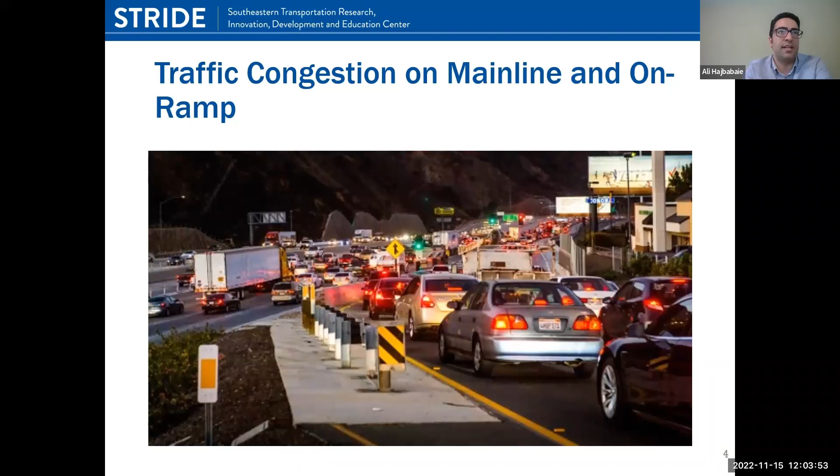What you see on this slide is a freeway that is pretty much congested, with an on-ramp heading to this freeway, and on-ramp metering signals on this on-ramp. The freeway is congested, the on-ramp is also congested, and what can happen in situations like this is that we meter traffic on the on-ramp to help the flow on the freeway. But the queue can spill back from the on-ramp to the interchange and then to upstream intersections, and the traffic congestion on the arterial street could be really bad.

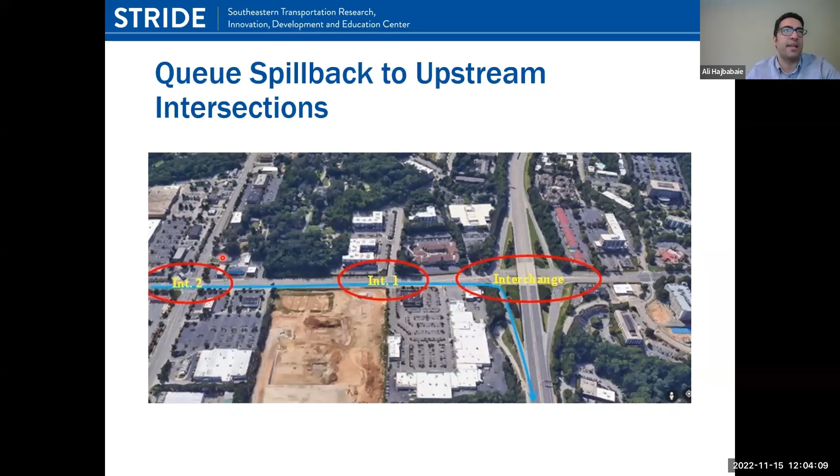So what are some solutions that can help mitigate this situation? First, we need to be able to predict the start of queue spillback from the on-ramp to the upstream intersections. When we can do that, we can either flush the traffic on the on-ramp — something that has been used, though the issue is that the traffic situation on the freeway main line could get worse, because then we don't control any of the traffic going from the on-ramp to the freeway. We can use upstream intersection signals to manage traffic more efficiently, distributing the queue that was spilling back to upstream intersections on the arterial street, or we can go a step further and use upstream intersection signals in coordination with ramp metering signals, essentially doing integrated corridor management operations.

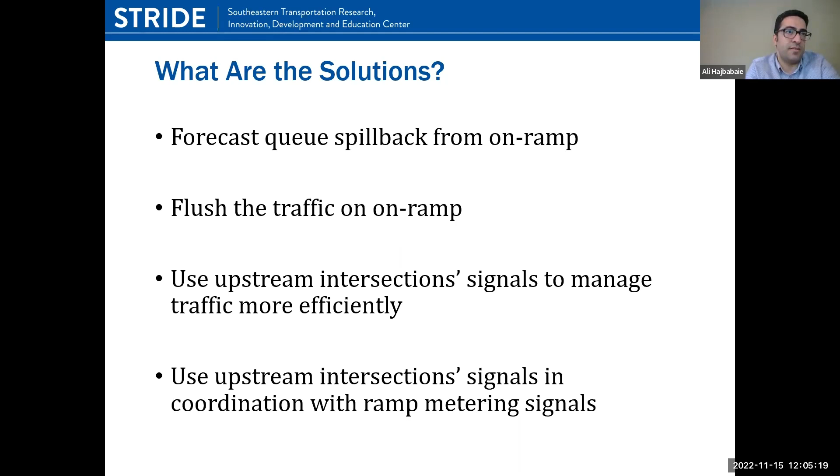Let's see what the objectives of this project were. We wanted to develop an integrated corridor management methodology — that was our overarching objective. To achieve that, we pursued three other objectives. One was to develop an optimization model for cooperative traffic signal and ramp metering control. When we developed this model, we integrated VISSIM because we wanted our results to be more representative of what happens in an actual corridor.

We also developed a procedure for adjusting arterial signal control to reduce on-ramp demand. This is a step-by-step procedure that allows you to work with signal timing on the upstream intersection so you can manage demand better on the on-ramp. We also wanted to develop a method to forecast queue spillback from the on-ramp before it occurs, which is critical to the two methods above so that you can activate them to prevent the spillback.

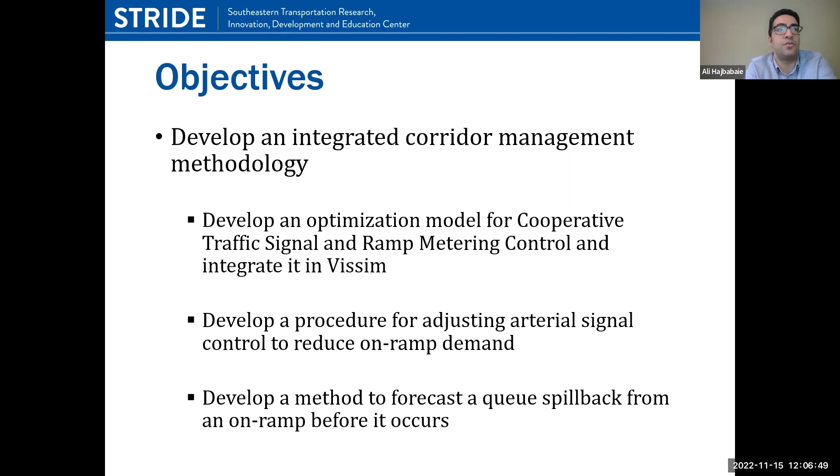I'm going to go through the first bullet point here, and Dr. Elefteriadou is going to introduce the second one, and Dr. Hadi is going to go through the third bullet point. So let's start with cooperative traffic signal and ramp metering control.

The way we addressed this problem was to develop an optimization model that does this control method. We formulated an optimization model — it's a mixed integer nonlinear program. That means we have decision variables that are continuous and also integer, and we have a lot of nonlinearity in that model, which makes the model complex.

We use the cell transmission model network loading concept here. What it does is take a link and divide it into homogeneous cells, and by that we reduce the complexity of the problem. It then has a logic to move vehicles from one cell to the other cell. This optimization model has an objective.

Our objective function here was to maximize the throughput in the corridor, maximize the number of completed trips. And we have the option of giving different weights to the trips that are completed on the freeway, on arterial, and side street.

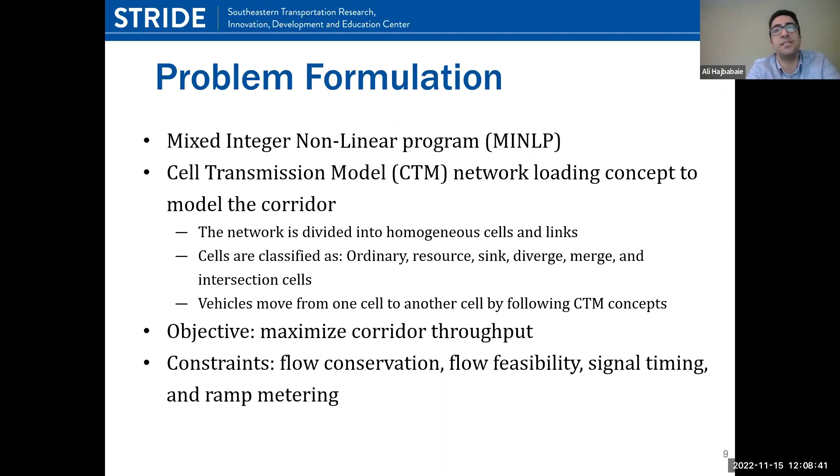We have a number of constraints here. We have flow conservation constraints, so we don't want to lose vehicles when they move from one cell to the next one. We have flow feasibility constraints, so flow always needs to be below capacity. We have signal timing constraints and also ramp metering constraints. I'm not going to go into the math here, but this is really the concept behind the model that we used here. And to solve this model, we used model predictive control.

This is an approach that is widely used in control problems. What it does is observe the current state of traffic, and we do that in VISSIM, the microsimulator that we use here. So we go to that and we observe the state of the traffic. Based on that, we predict the traffic state over a prediction horizon, usually in the order of a few minutes. Here, we were looking 5 minutes ahead of the current time.

Then we use our optimization model, we solve it, and that gives us signal timing on all the signalized intersections and also timing of the ramp metering signals. Rather than implementing those solutions in VISSIM for the entire horizon, we implement the solutions for our immediate next time step, in the order of seconds - could be 6 seconds, 10 seconds or so. Then this process is repeated over and over: we go to VISSIM, we gather data, we optimize, we implement, and we continue this over the entire study period.

So we took this and applied it to a case study corridor that we have in San Mateo, California. This is US 101, and we are looking at 1.6 miles of the freeway and also 1.6 miles of an arterial street that has an interchange with this freeway.

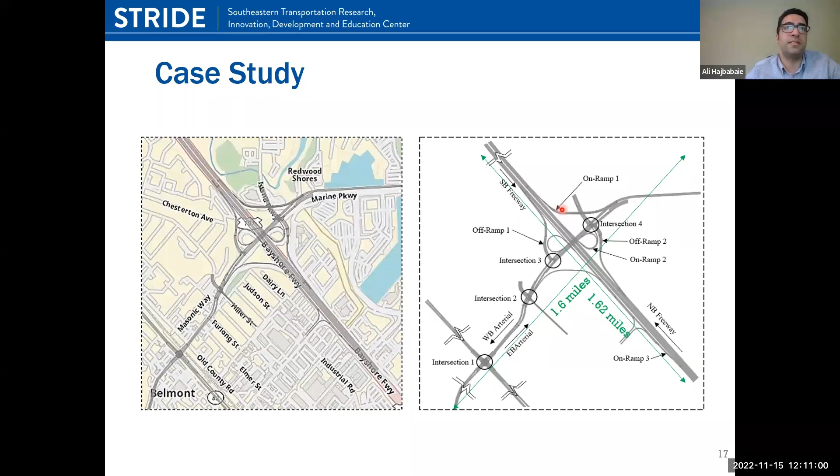Our main focus here was on the northbound freeway because we have two on-ramps that we can meter traffic using ramp metering signals. This is coming from a Federal Highway Administration project that created the VISSIM model and collected data here, and there are some ramp metering signals implemented in the simulation model here.

So we created 5 scenarios and tested those in VISSIM. The first one was the existing system with no metering - the existing system had metering implemented, but we wanted to remove those signals to see what we'd observe if there was no ramp metering. The second scenario was the existing system with the original ramp metering plan that was there.

Our third scenario was to optimize metering rates using our own algorithm. The fourth scenario was to only optimize signal plans on the intersections on the arterial, which we did on intersections 1, 2, 3, and 4. And the last thing we did was integrated control, where at the same time we are optimizing timing of signals on these 4 intersections, we are also optimizing metering rates on these 2 on-ramps.

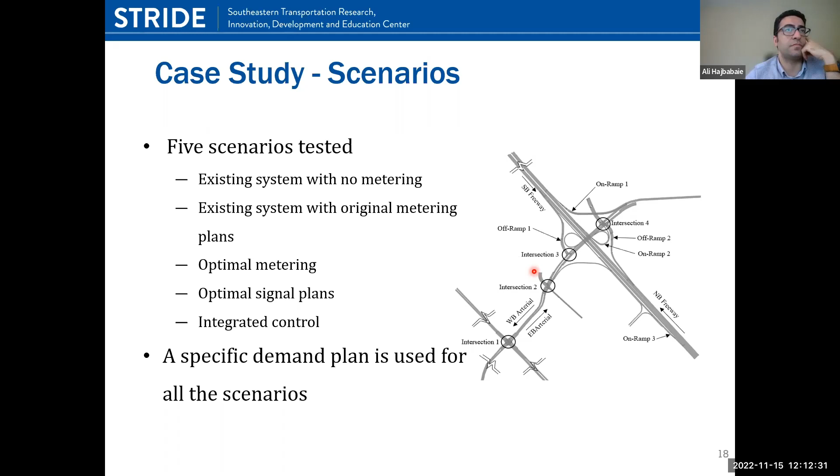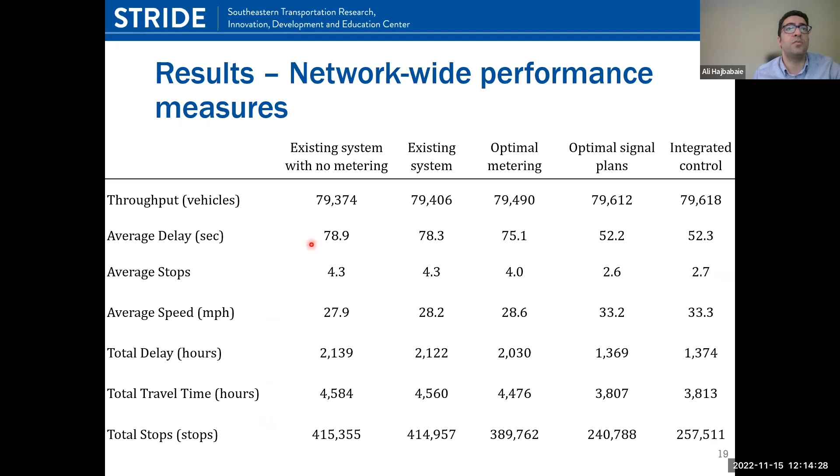There are a lot of other numbers here. I don't want to get into all of them, but I want to look into some other numbers on this network we've been examining. So we want to look into the eastbound arterial, on-ramp number 2, and also the northbound freeway in this direction.

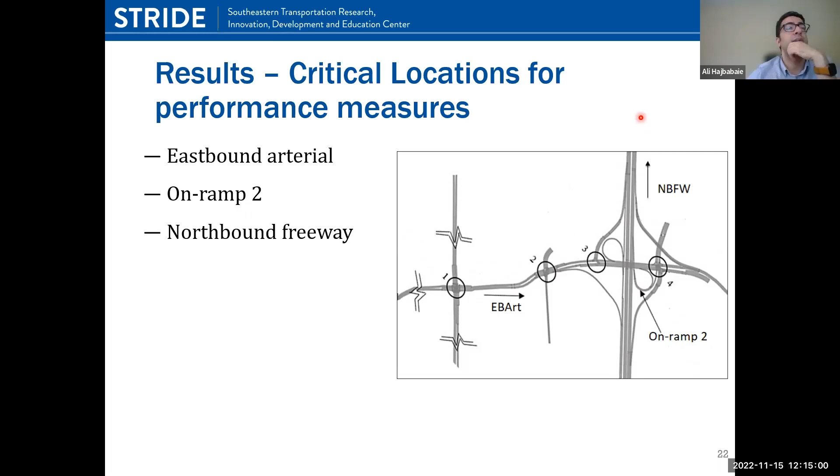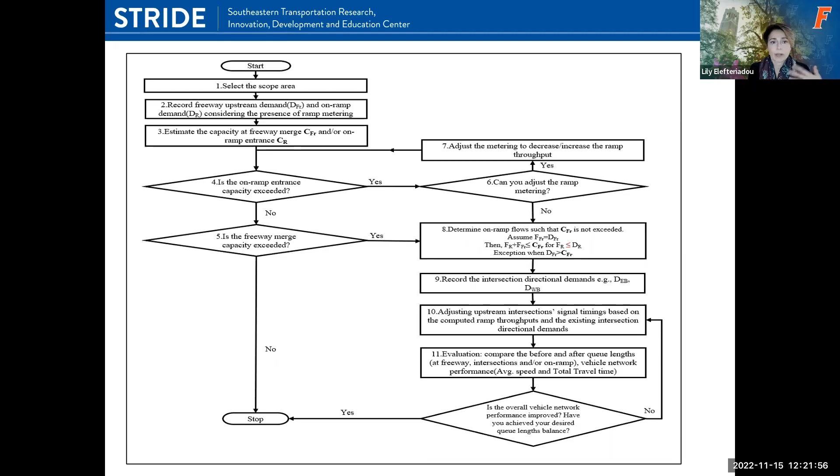So what we're doing is comparing what happens to the delay or the average speed for the entire network, and then what happens to the queues upstream when we are basically holding up traffic upstream so that it doesn't get to the ramp and lead to breakdown.

This is the first case study, exactly the same site that Ali already presented. We did two case studies I'm going to share with you: one is the full network, and the other is the truncated network, similar to what Ali presented. The site is in California. We also did a similar process for a third case study in Florida.

I won't go through the results, but it's in our report. That third site is the one Mohammed's going to talk about later.

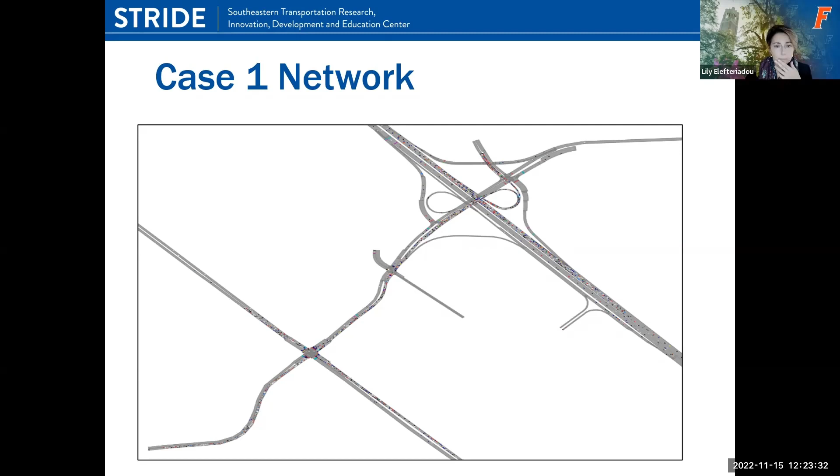Of course, as with any system, there's only so much you can do. If you have significant demand on a consistent basis, then sooner or later you're going to have a breakdown. But with this approach, we're able to delay it.

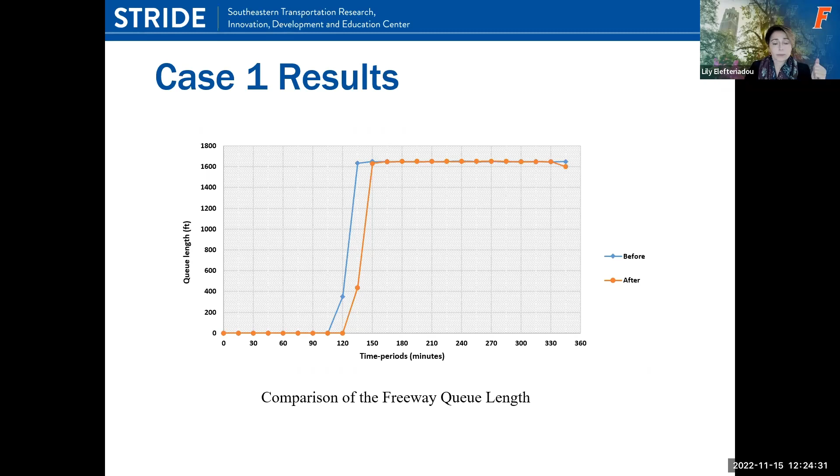The next slide shows for the three intersections what's happening with the queues. For the first intersection, at the top of your screen, you can see the comparison of before and after. Clearly with the after, we have increased queue because we're holding back traffic, but not by such a significant amount. With the before, the queue started to develop closer to 150 minutes, but with the after, it started a little bit earlier. Length was consistently around 400 feet, which depends on where you are — you may be able to manage that depending on the length of the segment.

Same kind of comparison for the second intersection's queue. Here we were actually able to have pretty similar queues. It goes back and forth in terms of length, and during the majority of the time the queue is pretty similar. For the third intersection, the queue was actually a little bit less. So not a huge change in terms of the queues observed on the signals, despite the fact that we were holding back more of the traffic, but there was some improvement on the freeway.

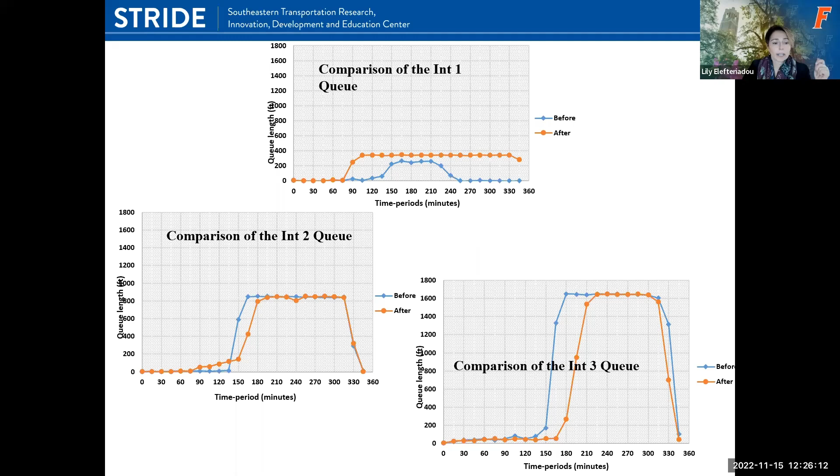In the next slide I'm going to show you the overall network comparison. For this particular network, the average speed, considering the entire freeway and arterial, was on average better with the control for the signals. Not a huge change, a few miles an hour for the entire network, but still overall we were able to achieve better performance and improve the freeway operations a little bit without significant impact on queues for the upstream signals.

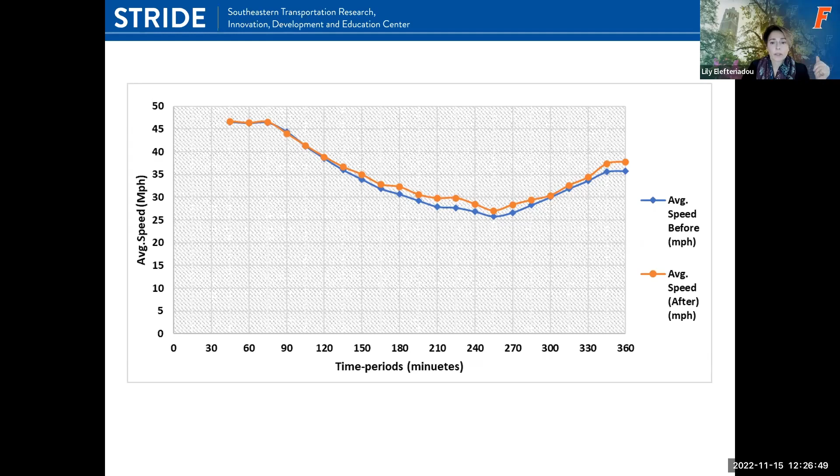Now the next network is pretty much the same network, but it's more extended, and I think this is the one that's more along the lines of what Ali's team used.

So we followed the same procedure, but because we had additional segments, the breakdowns were at different locations. So the entire process was similar, but the results were somewhat different.

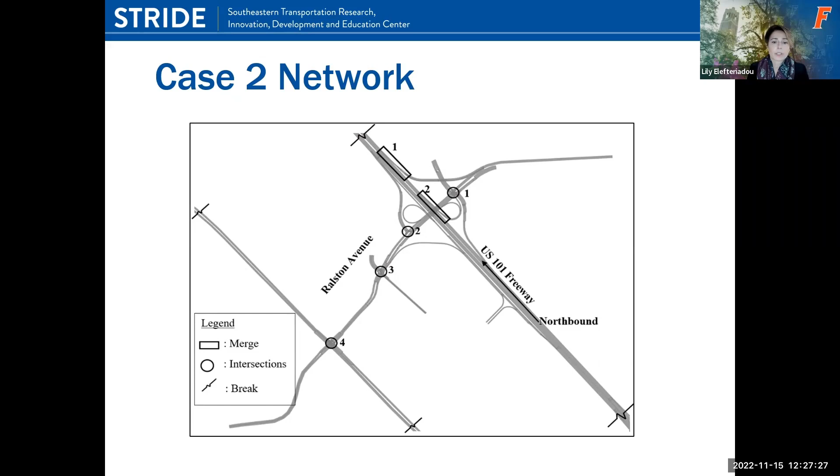Depending on the network, you might have more significant improvements, and this depends on a couple of things: how extensive your network is and how far back you can start controlling the signalized intersection. The closer you are to the merge, the less you can do in terms of holding back traffic.

This is for the extended network. We were able to do more.

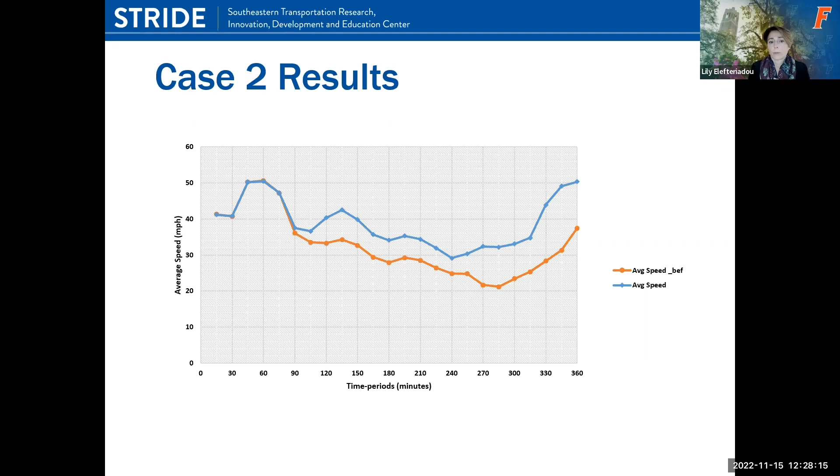So the next one is our third topic point that we are going to talk about: machine learning models for predicting capacity reduction resulting from ramp queue spillbacks. Dr. Hadi will be talking about these parts.

Thank you, Ali. Our work is, as Ali said, to predict the spillback before it occurs, such that you can apply methods to address or mitigate that effect, such as the ones that Ali and Lily talked about.

So this network is the third network, or the second network that Lily mentioned. It's in Florida, near the I-95 facility, and it is basically now a segment of Northwest 119th Street, which is an important arterial. We looked at the intersections in the vicinity of the interchange with the I-95 northbound and southbound.

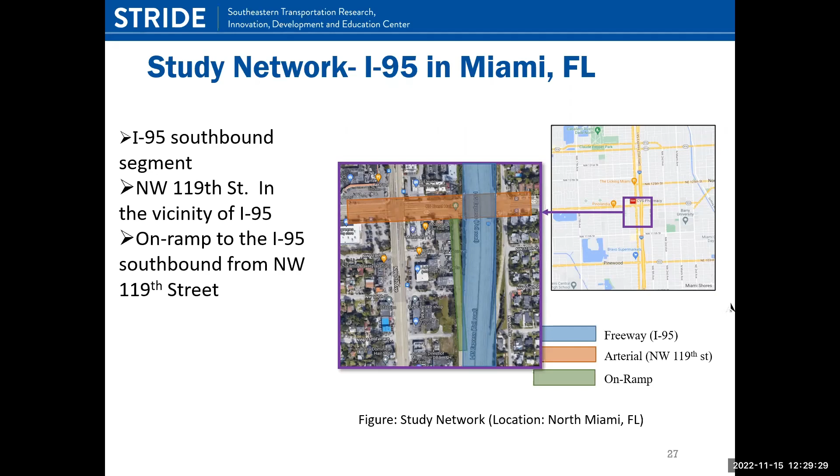So basically what we wanted to do is look at using machine learning in predicting the capacity reduction due to spillback.

And we use two models. One of them is a categorical model that we use to estimate the percentage change in capacity based on three categories.

When we looked at the traffic or the reduction in capacity based on the data, we could see three distinctive categories of reduction in capacity. So we wanted to have those as a categorical variable arranged basically for each of those drops in capacity.

For that, we used a decision tree model, and we fed the results into a fuzzy logic, fuzzy rule-based system model, to consider that the decision tree results are crisp results, while in reality it can be stochastic. So the fuzzy rule can take that crisp output and change it into a fuzzy one.

For the second type, it's an LSTM-based recurrent neural network model for the categorical model.

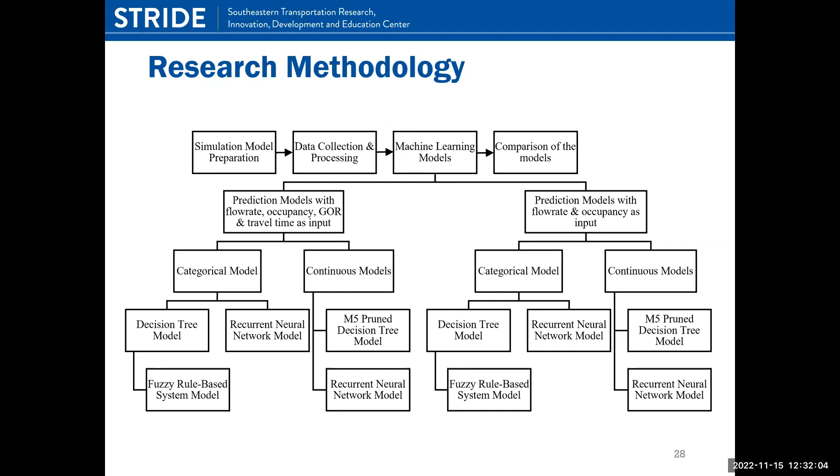So let's try to do the model without those and only include the flow rate at a critical location and occupancy. By the way, this occupancy is the occupancy at the on-ramp, at the queue detectors on the on-ramp, while the green occupancy ratio is at the stop line of the signalized intersection.

So again, we use a simulation model, which we calibrated based on the real-world data. Because of the location of the detectors in the real world, they have high-resolution controller data and ATSPM data, but the problem is that the locations of those are not optimal for all the variables that we needed. So we decided to go with the simulation models, and we recommended changes to the configuration of the detectors.

So the model segment included the 6 signalized intersections of Northwest 119th Street, and the model was calibrated based on the field data, as I mentioned.

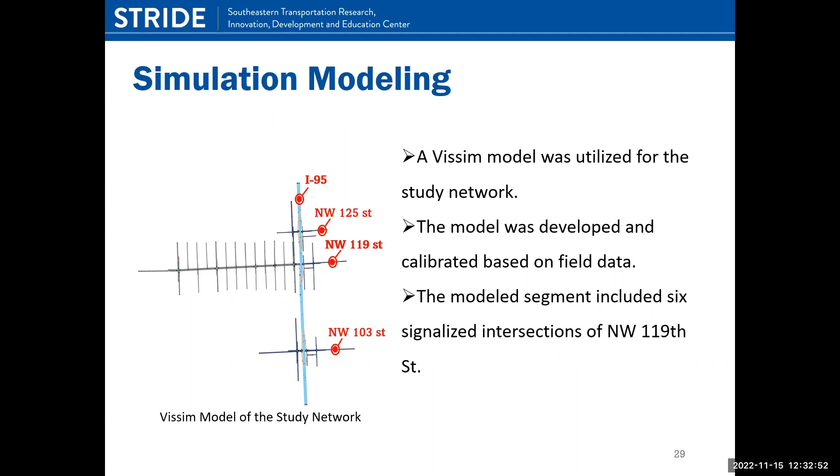We included different variables, including the GOR at different locations, the flow rate, the queuing on the on-ramp, and occupancy at the on-ramp, and so on. Then the capacity reduction rate, either as a category or as a continuous variable, was the output from the models.

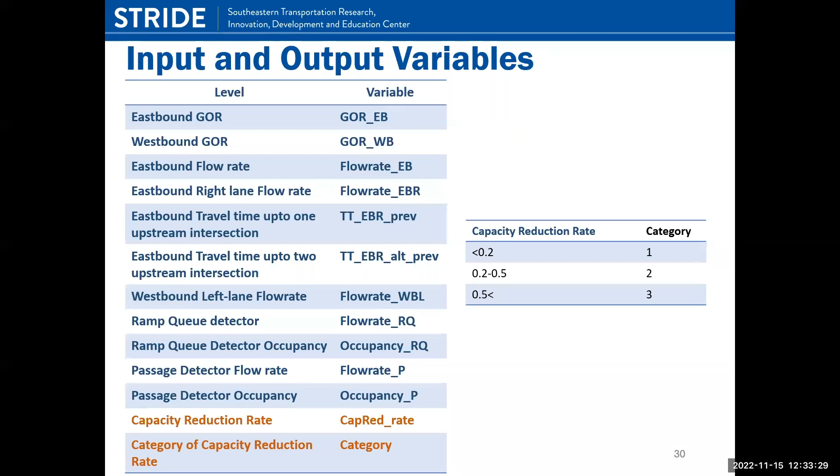So when we run the models, using the parameters normally recommended for testing machine learning models, they generally produce good results with the LSTM-based recurrent neural network, producing somewhat better results in terms of the standard machine learning model parameters. We looked at it further from a traffic prediction point of view, and that confirms the recurrent neural network produces better results, as we're going to see in the next two slides.

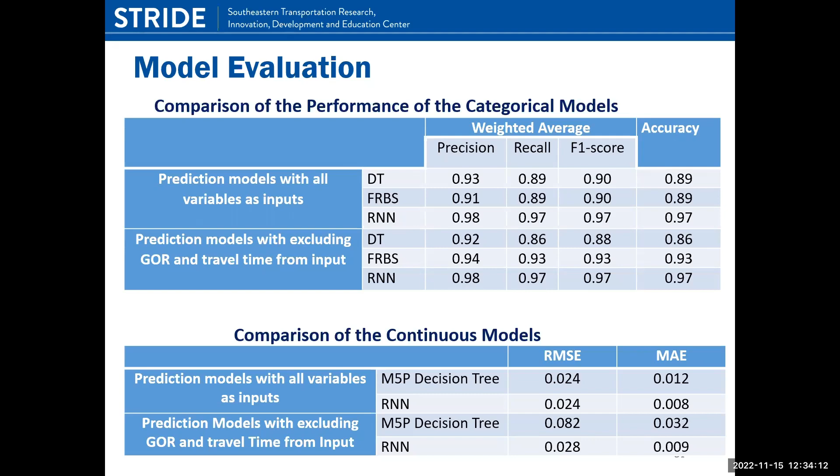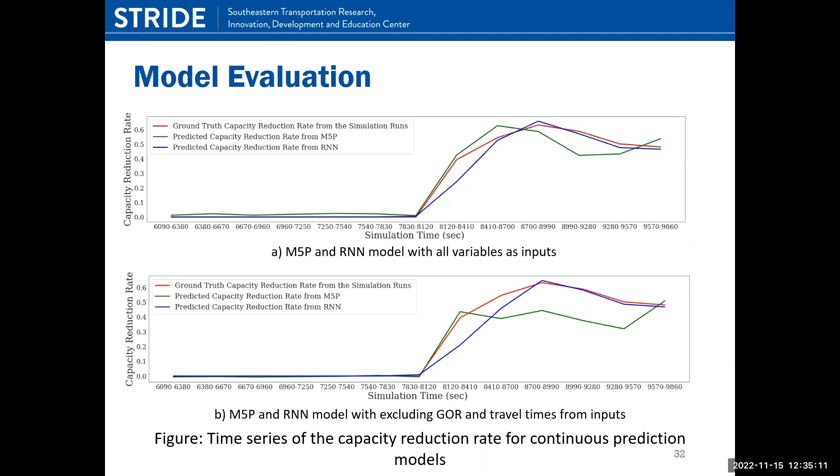So if you look at the time steps and the prediction, this is an example. When you look at the continuous model with the M5P decision tree versus the RNN, the red is the ground truth, the real spillback and reduction capacity, while the blue is the prediction from the neural network, and the green is the prediction using the M5P. You see that the blue is closer to the red when we use all the variables, and when we exclude the green occupancy ratio and travel time from the inputs, the difference becomes even higher. It looks clearly that the RNN is producing better results here.

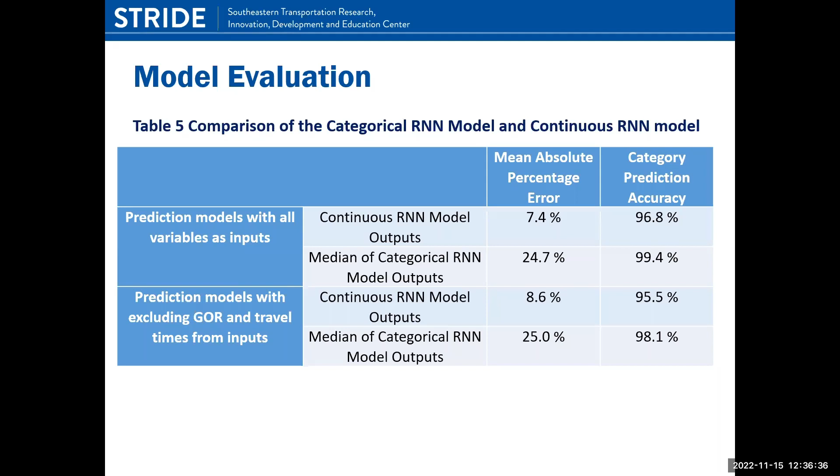Next, when we look at comparing the categorical and continuous model in terms of the ability to estimate the category of the drop and estimate the actual value: when we compare the continuous value or percentage error, obviously the categorical model will not be able to estimate the continuous value of the reduction, so we assume that with the categorical model the median is used in the comparison. We could see that the prediction of the category is better with the categorical model, but only by a little, 99.4 versus 96.8. But when you want to predict the reduction as a continuous variable, the continuous model was able to predict the reduction better than the categorical variable, as expected, at 7.4% versus 24.7%.

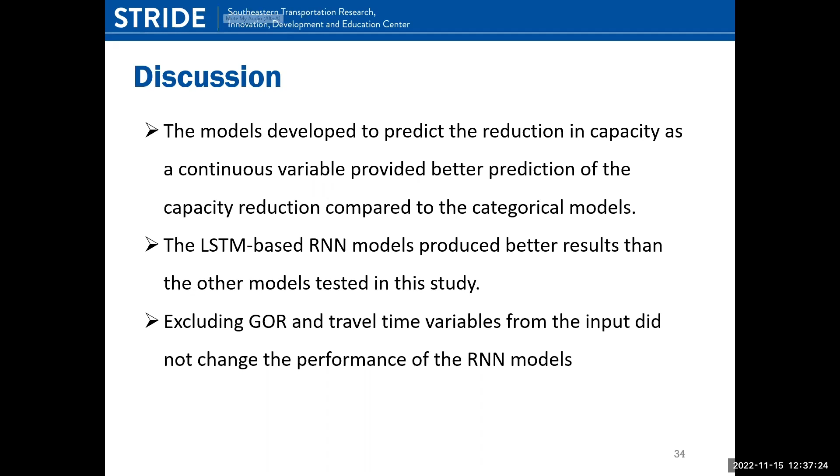So in summary, the models developed to predict reduction in capacity as a continuous variable provided better prediction of the capacity, and the LSTM-based recurrent neural network model produced better results than the other models tested in this study. Excluding the green occupancy ratio and travel time did not produce better results - in fact there could be a little bit of deterioration in the results, so it may be useful to include them. The difference is not that high between including and excluding them. And I think that's my last slide.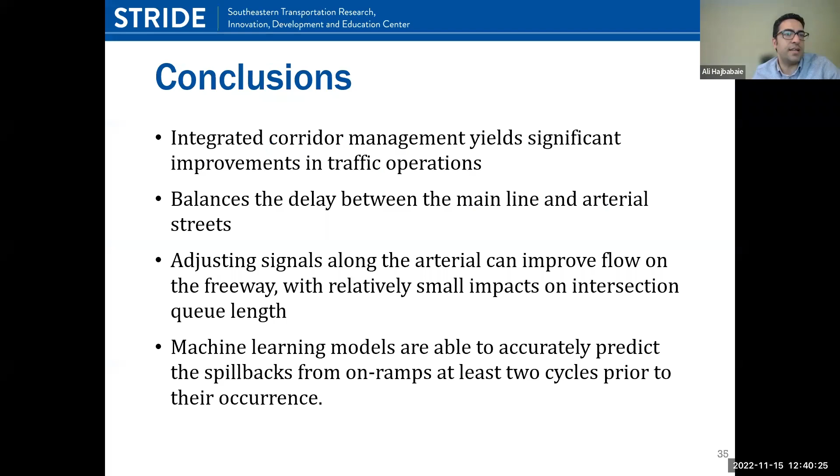Yeah, I can talk about that for a second. I'm not showing all the details of the solution technique here, but we are following model predictive control. So what that means is that we are observing the current state of the system, looking into VISSIM, looking at where vehicles are, and then based on that we feed that information to our cell transmission model and predict traffic state over a prediction horizon - usually several minutes for us.

And when we do that, we run the optimization and find the optimal signal timing parameters and ramp metering signals for the next 5 minutes, but we only implement them for the next few seconds. We enter them in VISSIM, let VISSIM go forward for those few seconds, and then we repeat this over and over until the end of our study period, which was either 2 or 4 hours, if I'm not mistaken.

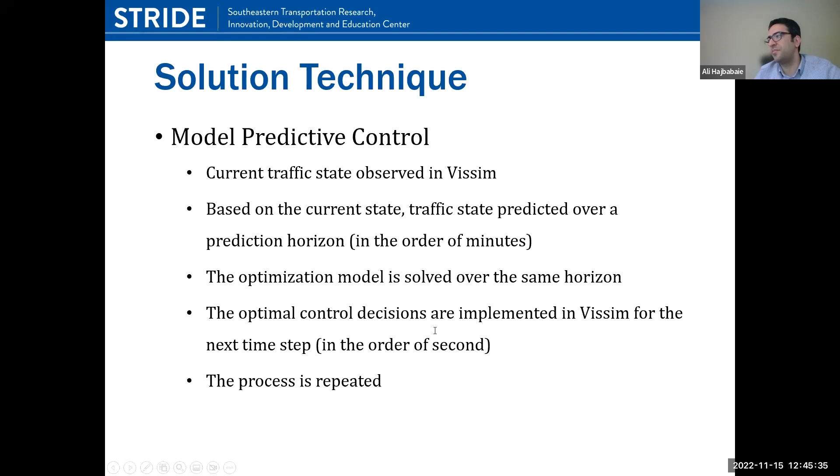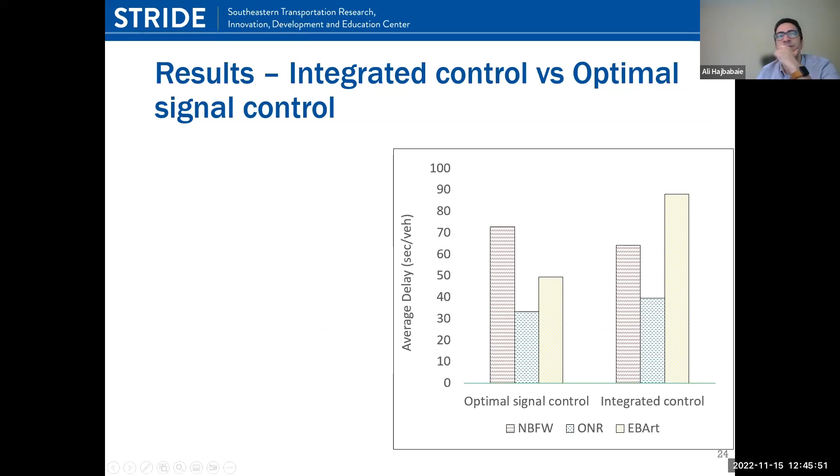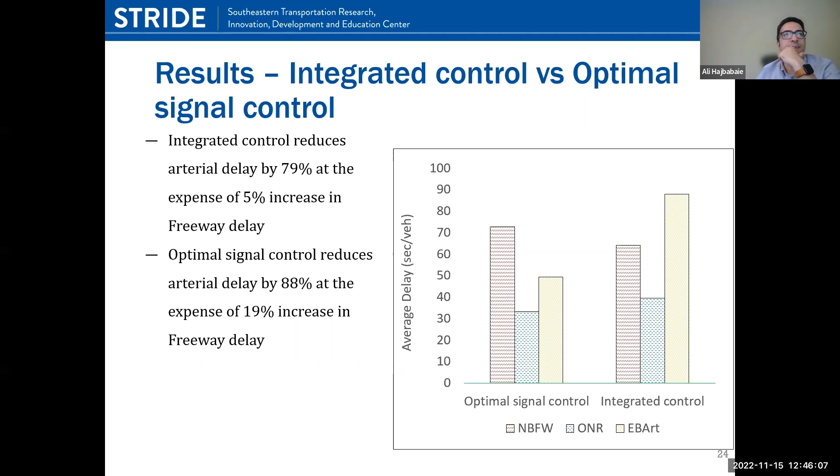Musa is asking to go to the results where you compared three things in your model. Musa, which slide do you want me to go to? Is this the one you have in mind? Okay, so this is not the one. How about this one? Okay, so what's the question?